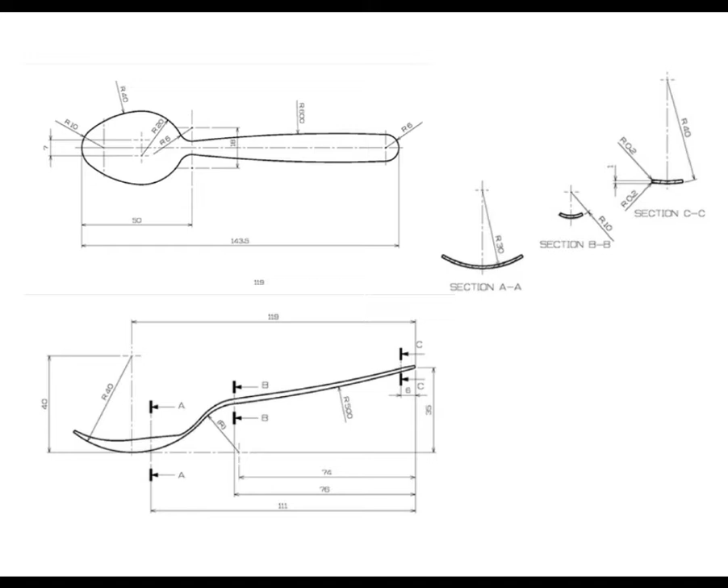Hello everyone, I'm Desiree Riveros, and for today's video we're going to make another 3D figure using SolidWorks. This will be our output for today, along with the measurements we will use to accomplish our task.

Let's start. First, open a new file and select part, then we will change the measurements to mmgs and to plain white.

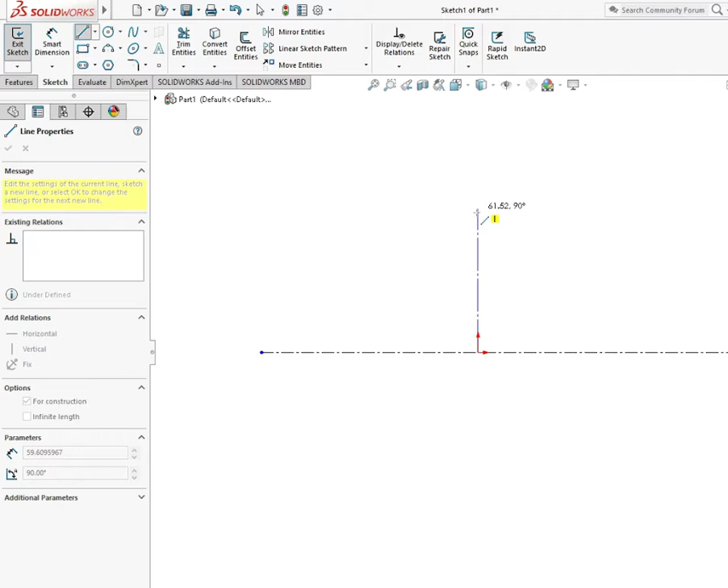For the first one, we should use the top plane and sketch, and have a center line horizontally, and another center line from the origin upwards, and onto the other side.

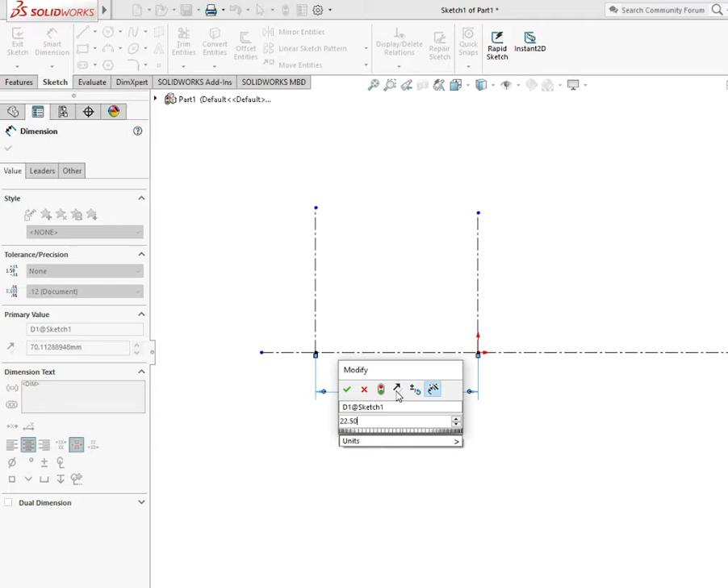Now we will put dimensions. From here to here we have 22.50 as a measurement, and then 105 in this part.

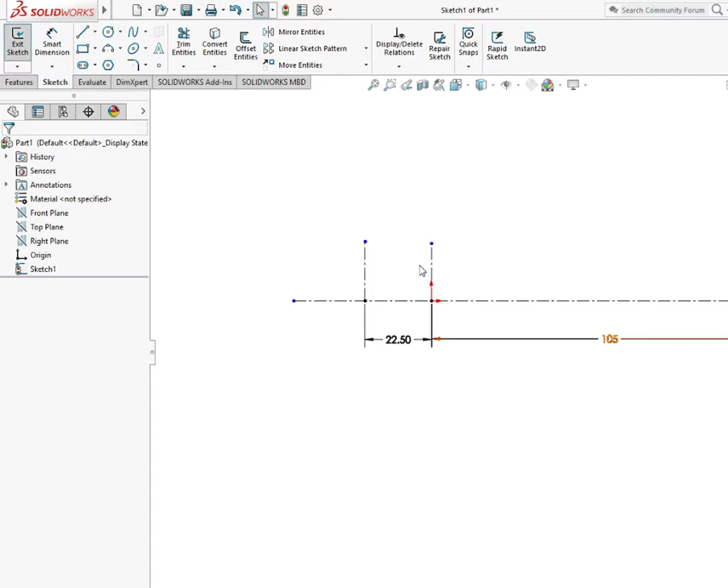We just need to adjust the center line. First thing to do is we need to have a 3-point arc here, then select the center and this point, and merge point.

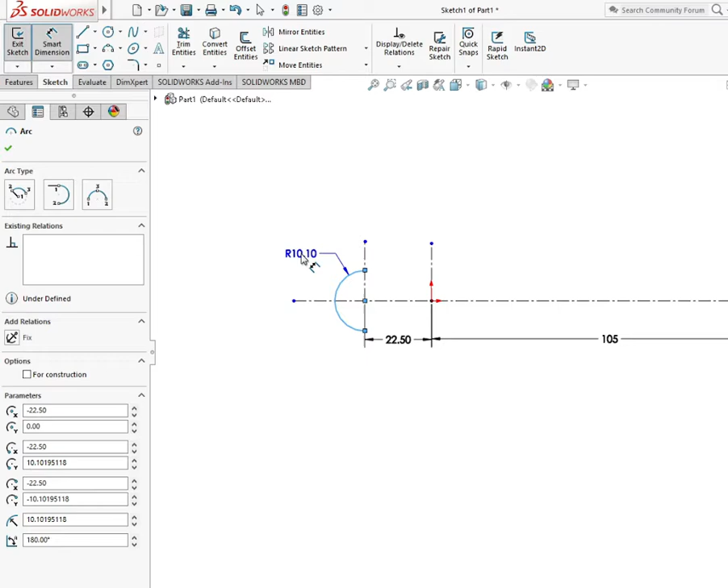Now let's put dimensions. So it has a radius of 10 millimeter, and vertical.

Next is we will use the center point arc. So from here, let's draw an arc to this side up until here.

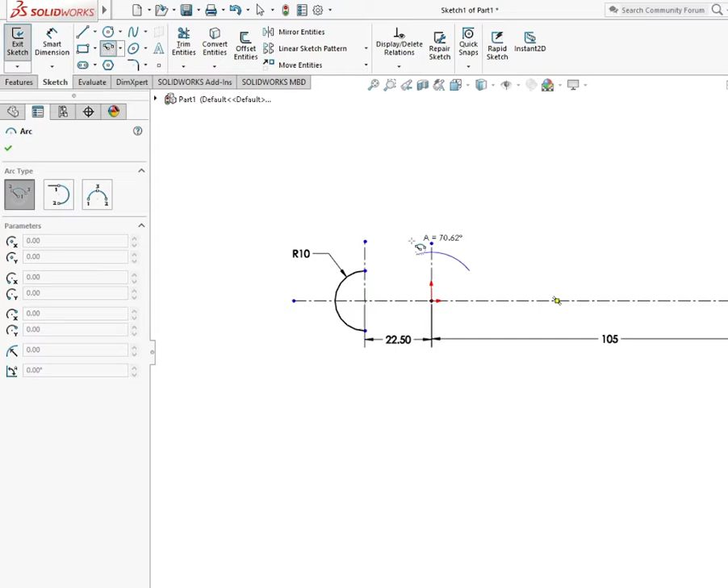Before we have a measurement there, we should put a 3-point arc in the middle and make tangent the connections.

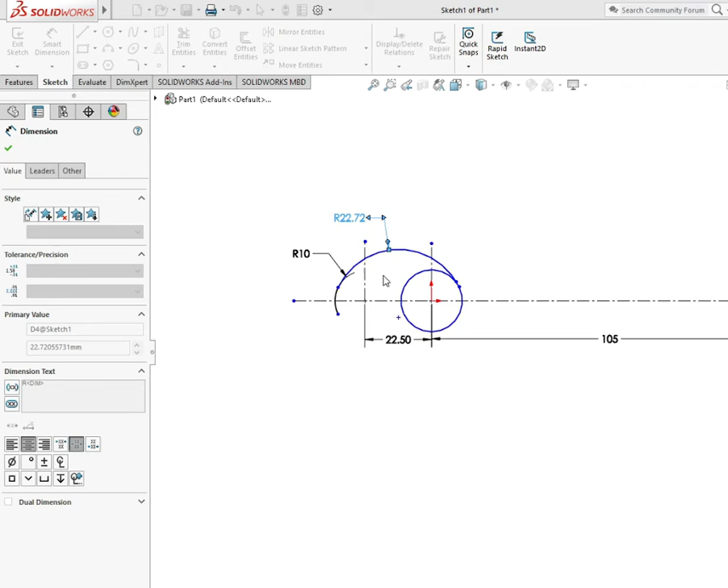Now we will have the dimensions of the two arcs. The radius of the second arc is 40, and the third one is 16.50.

Now we will draw another 3-point arc and make tangent. So we have a vertical dimension here with 9 millimeter as a distance, and then a radius of 6.

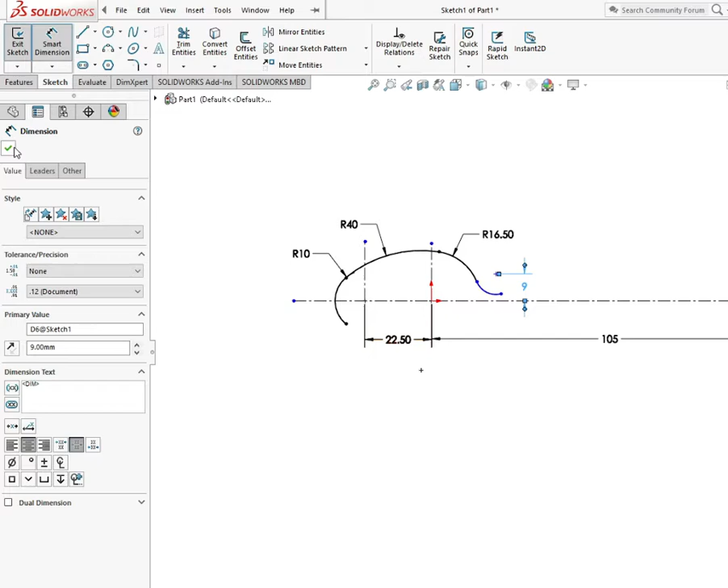We will proceed on the end of this figure. So let's have a center point arc and have a dimension of 6 as a radius.

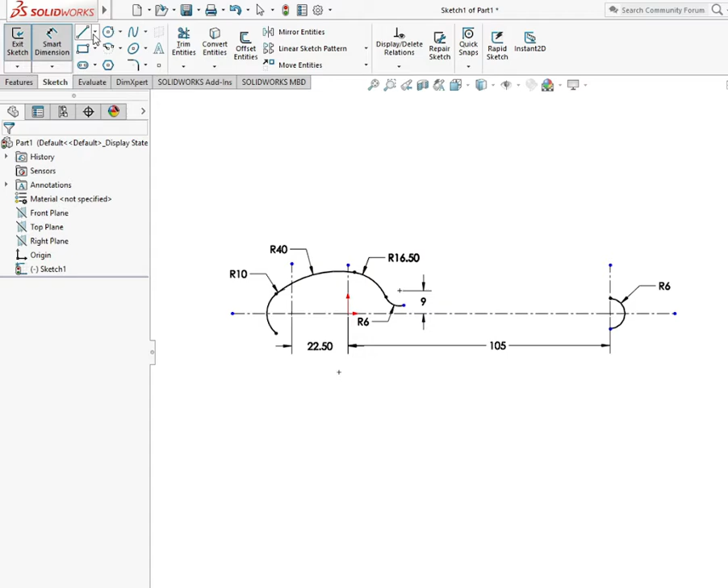Now the handle, the spoon, let's have a 3-point arc here and make tangent, and have a radius of 500.

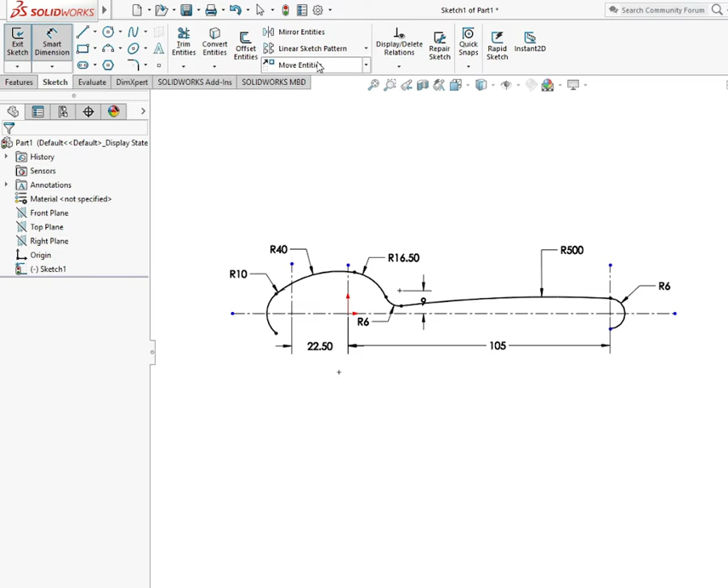Next we will use the mirror entities and select these 4 arcs and mirror about the center line. So now we have the top view of our figure.

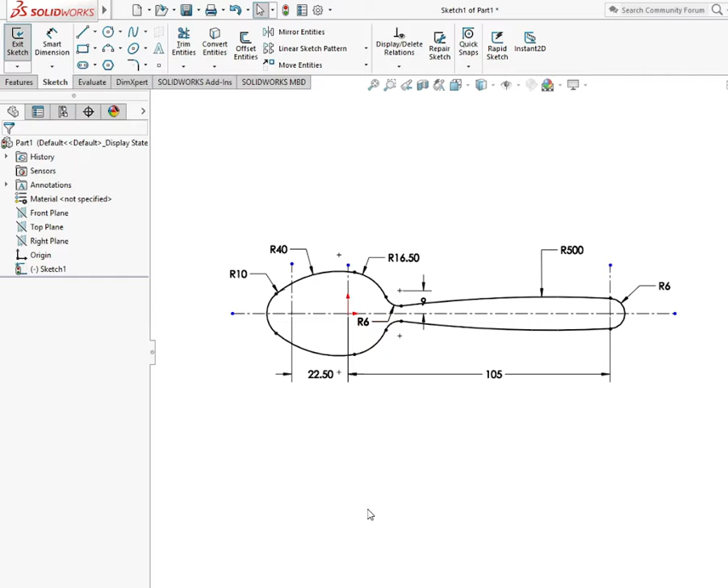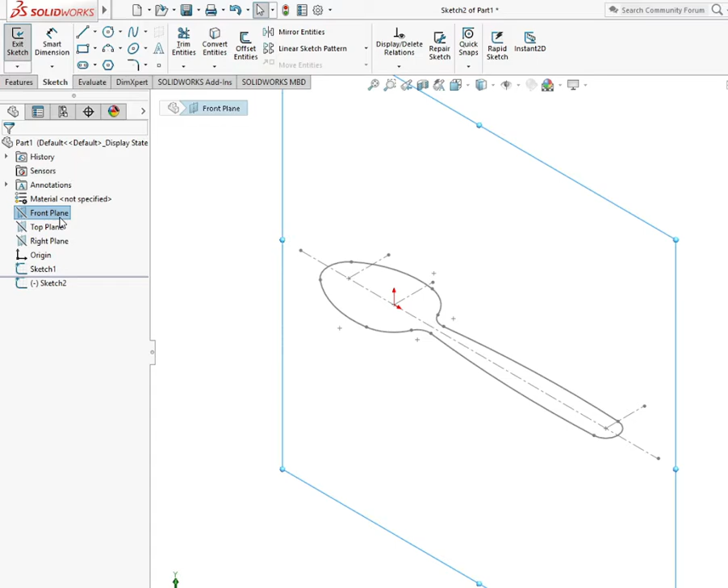Now let's put the figure in an isometric view and select the front plane, sketch, and normal. Let's create three-point arcs in the bottom of the figure.

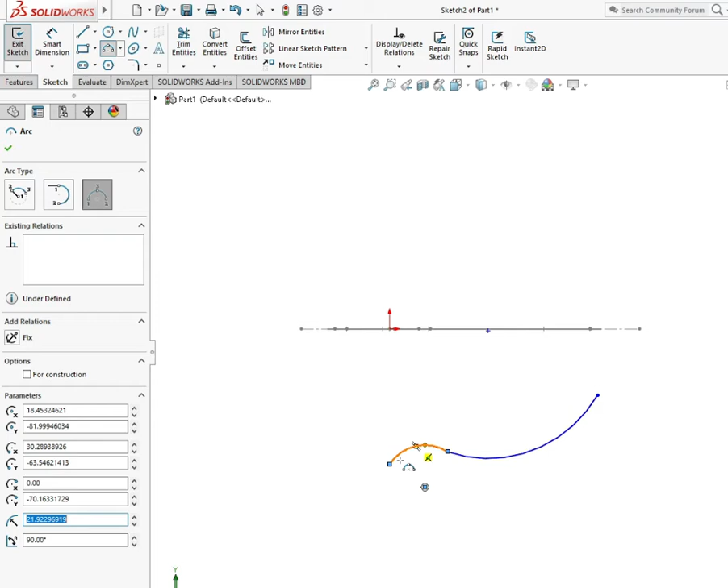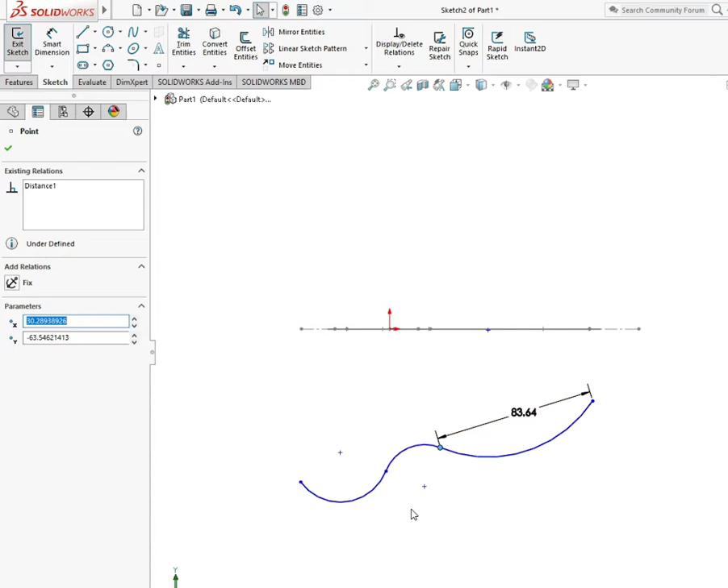Let's make tangent the connections of the arcs. So we have first a distance of 84 as a length, and then 12, and another distance from end to end with 54 millimeter.

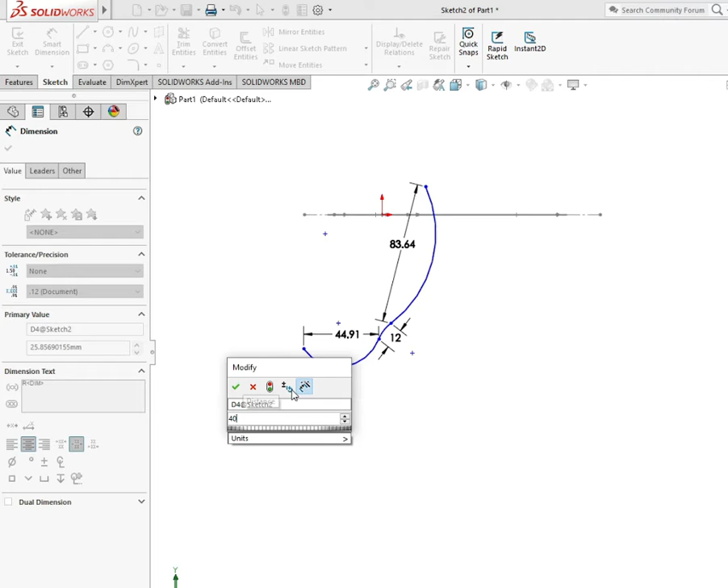Now let's change the radius. So here we have 40. For the second one, we have 20 as a radius. And this one is 500.

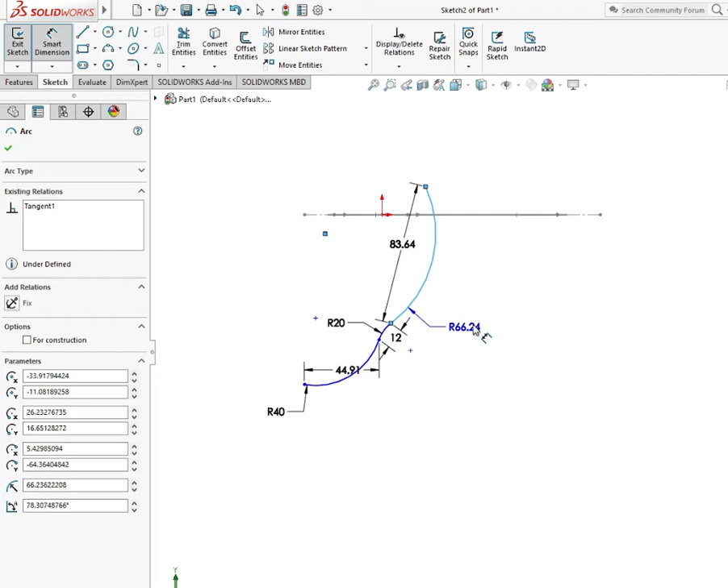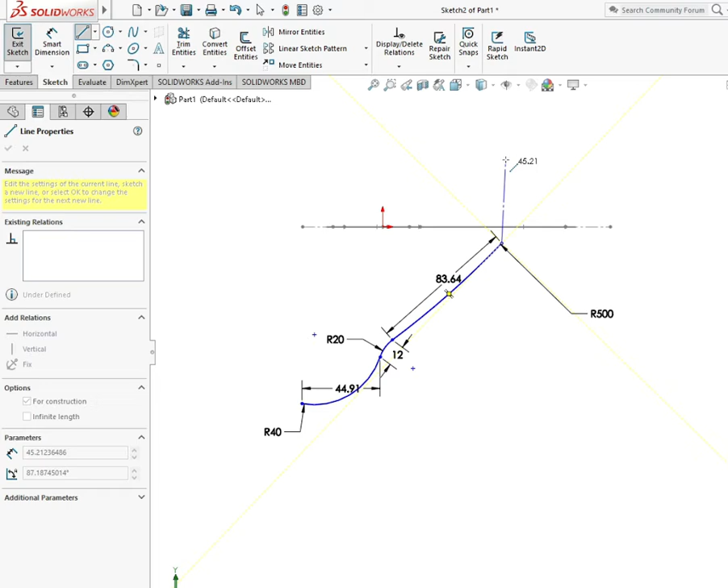Now let's create a center line at the end of these arcs, select this point and the end of, and make pierce.

Now let's have the distance of 143.50.

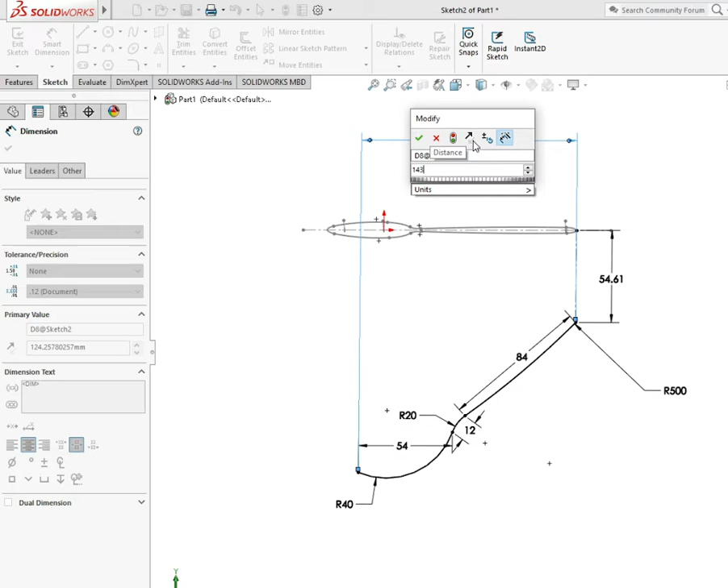Let's create a center line from the origin downwards. The second center line is at the end of the second arc, the center of the last arc in the top view, and there you have it.

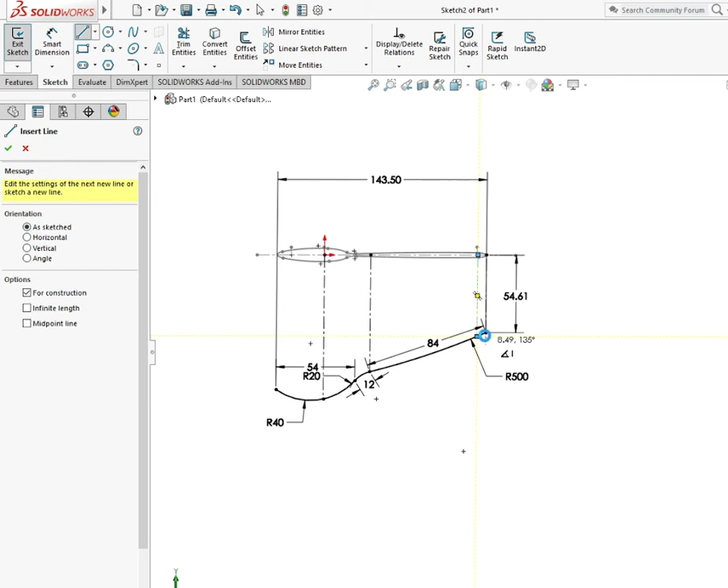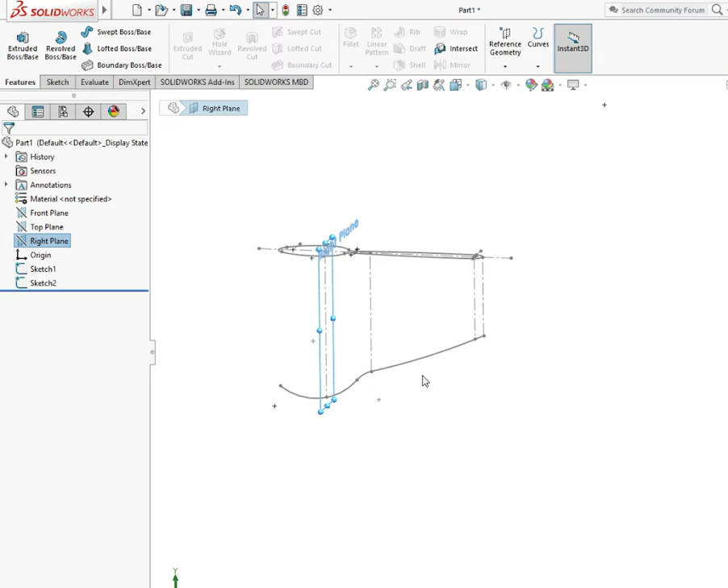Now let's exit the sketch and select the right plane, and from the reference geometry, let's select a plane. Then select this point, another plane, and select the other one. Let's just show the right plane so we have a guide.

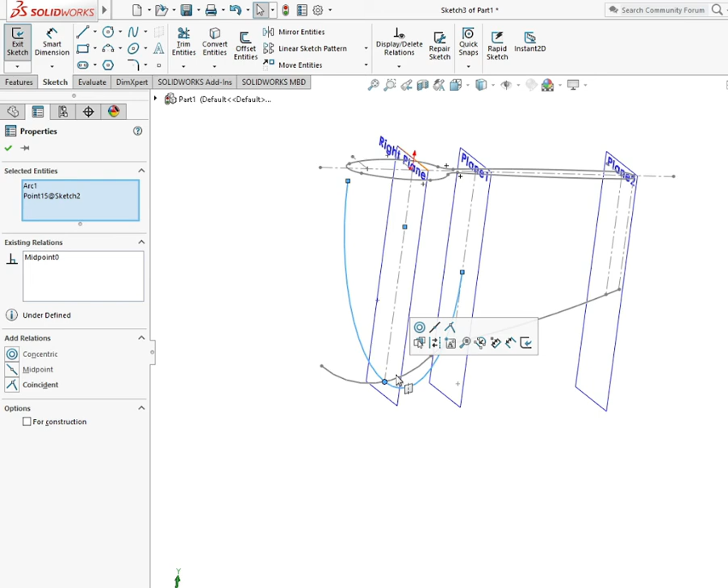From here, let's have a 3-point arc again, select this arc and the point, then midpoint, so let's have a radius of 30.

Another 3-point arc, and select the midpoint. It has a radius of 10.

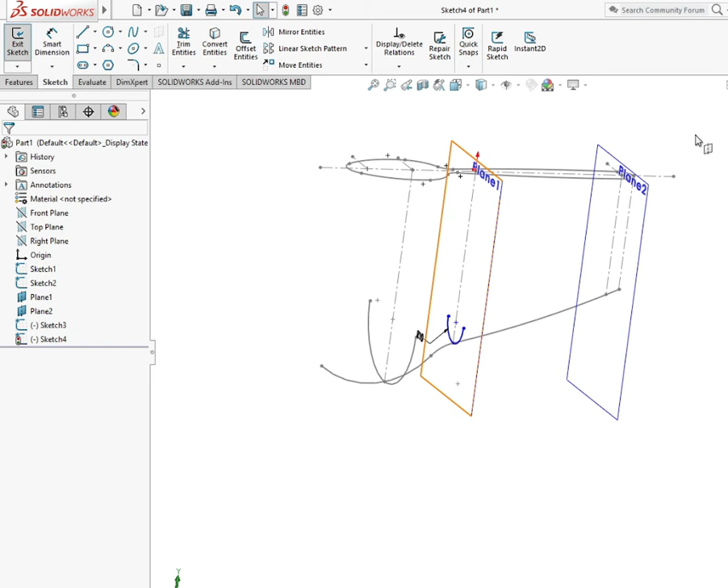For the third one, it has a radius of 40.

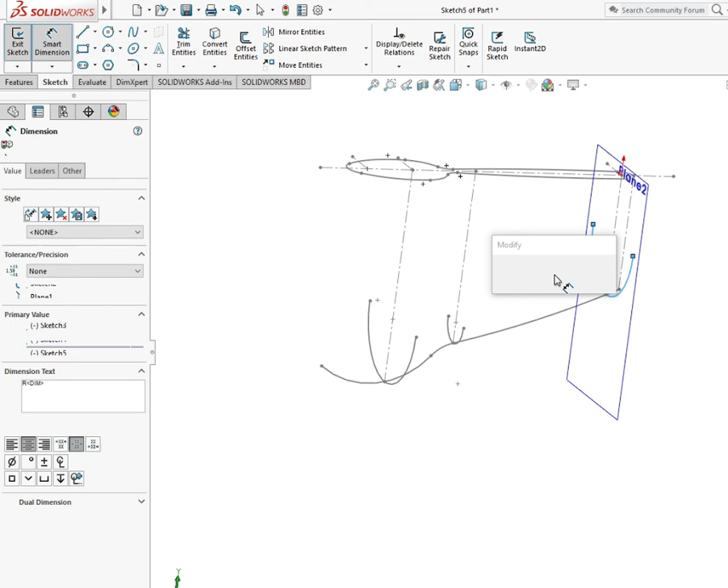Let's hide the planes.

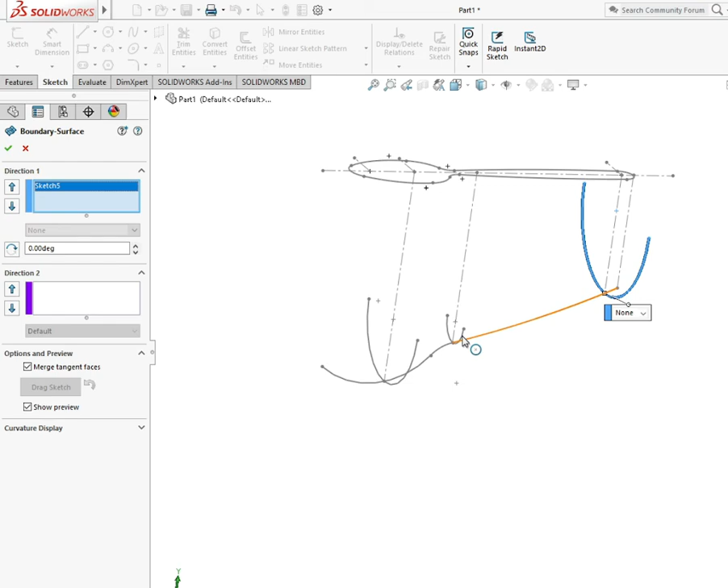Now we can insert from the surfaces, boundary surfaces, and select this arc and this one, and have a direction 2 of this sketch 2, and select OK.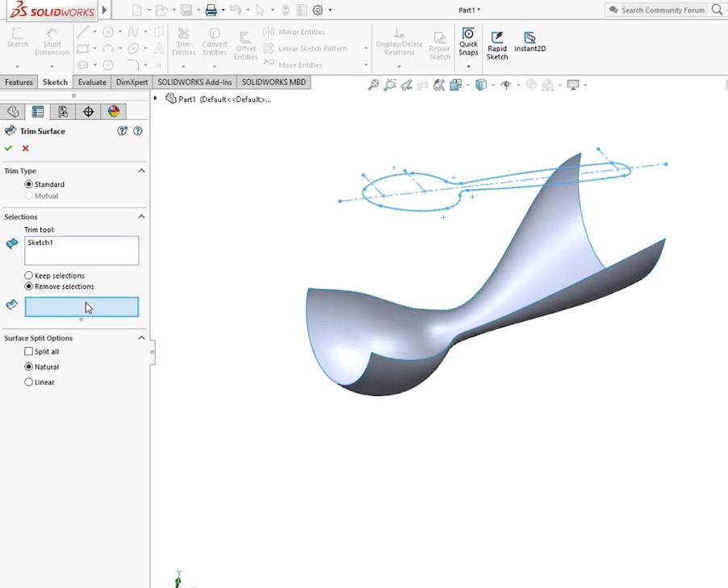Now for us to have the spoon, let's trim this one and select the top view as a trim tool, then select this side and this one to complete our output.

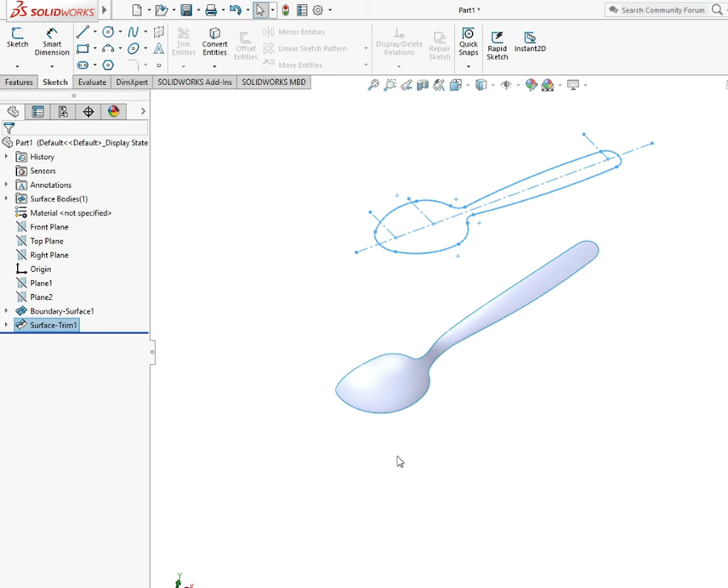So yeah, we have this spoon, but we just need to thicken this, and let's search it in the commands. 1 millimeter is enough.

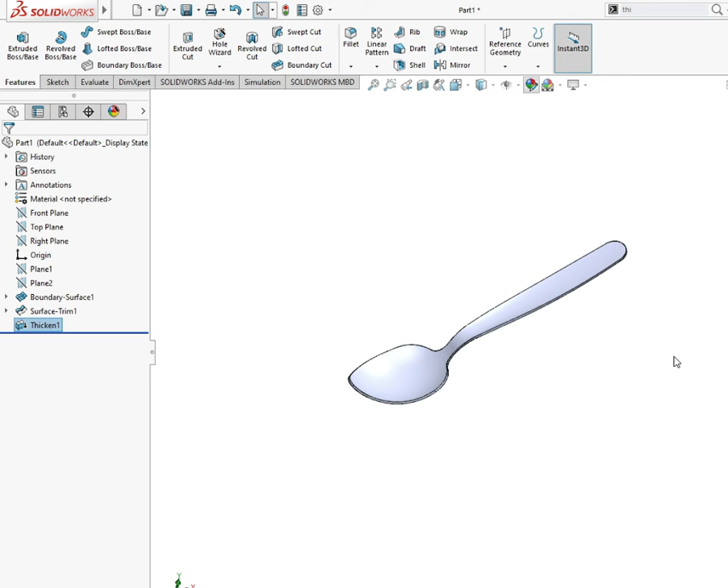So that's it, we are done. We just need to, in your preference, change the appearance of the figure.

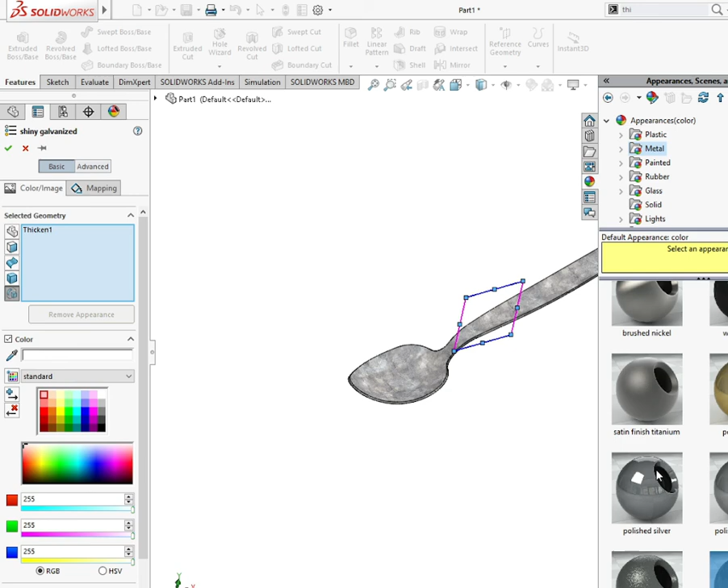So I changed this to polished metal, but we also have different kinds of choices here: bronze, nickel, silver, and gold. However, I've chosen the polished metal.